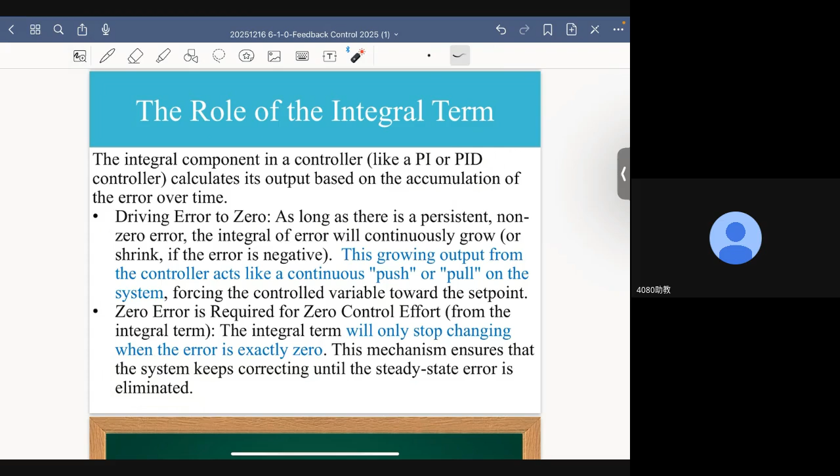It will only stop changing when the error is exactly zero. So this mechanism of integral control ensures that the system keeps correcting until steady state error is eliminated completely. That is why increasing the type number of the loop transfer function is very helpful for us to reduce the steady state error.

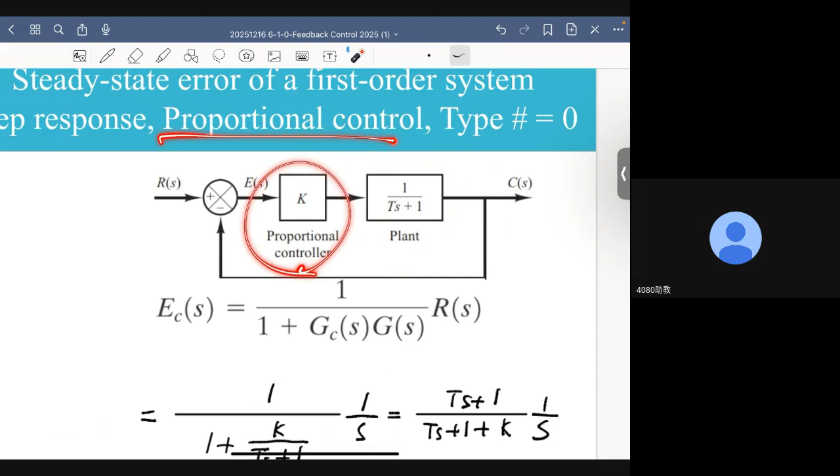Let me study a simple example: steady state error for a first order system. This is a first order system, and apparently the time constant is T, and what we have here is a proportional control. From the loop transfer function, in this particular case, the type number is zero.

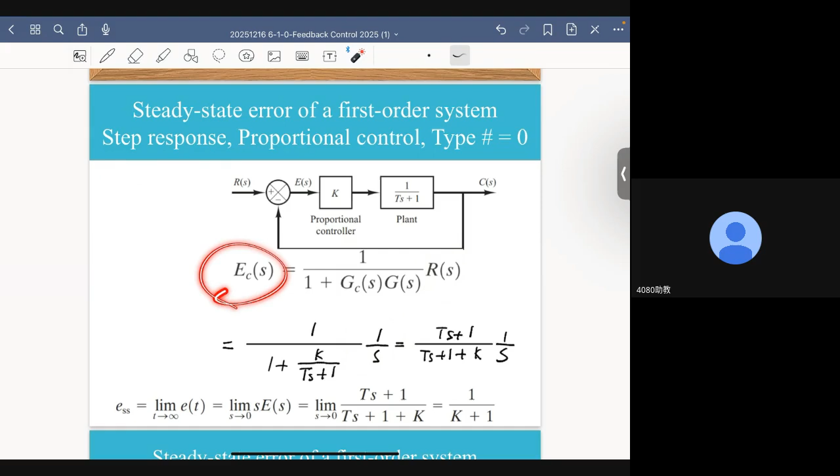Now, what is the output error of this feedback control system based on these equations we have already seen many times? It is this. Since GC is this, G is this, which is just nothing but a K, all we need to do is plug these terms into this representation, and this is what we get. Remember, here we are studying the step response of this feedback control system, so the nominal input is 1 over S. So this is the S domain representation of the error.

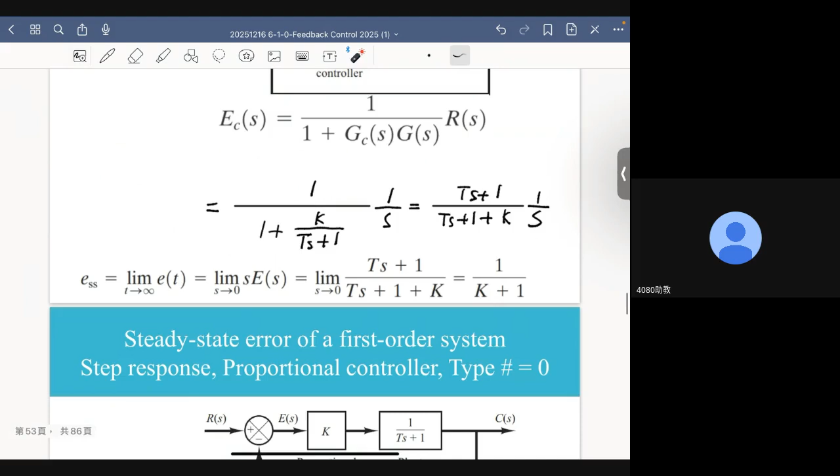Again, by applying the final value theorem, we know that the steady state error is this. This conclusion agrees with what we have learned: by increasing K, we increase the loop transfer function, and as a result we can have a smaller steady state error. Now, this is the result of the computer simulation of this feedback control system.

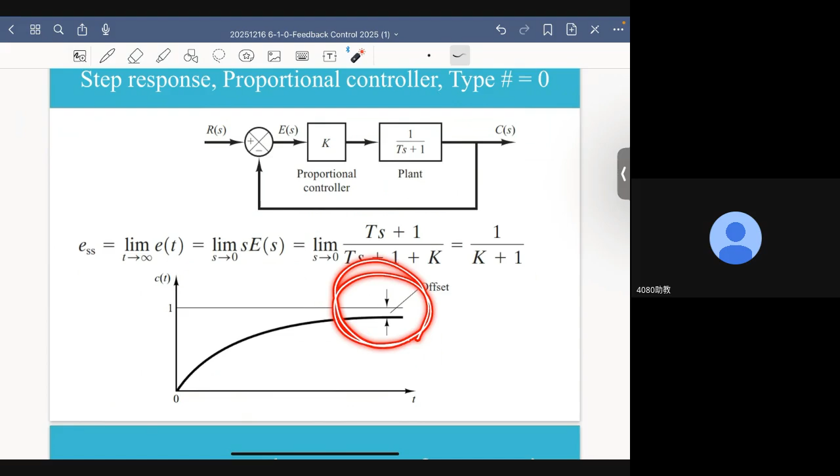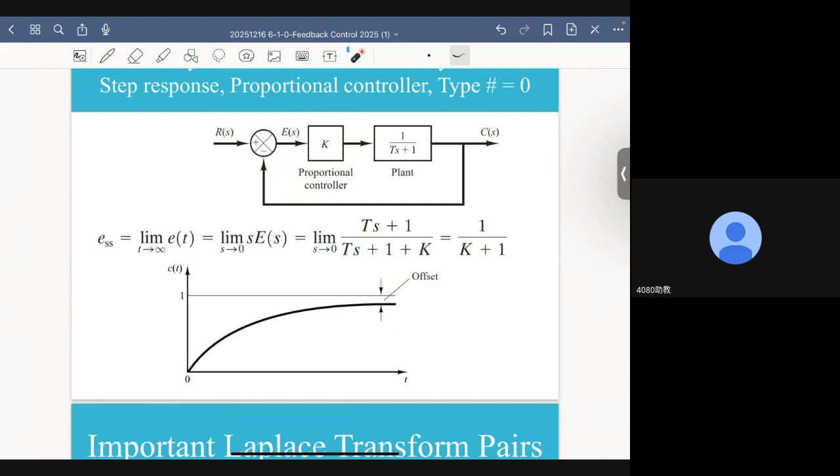As you can see, as time progresses, between the actual output and the desired output there is still some minor difference, which is this 1 over K plus 1. So by using a larger proportional gain, I can reduce this steady state error. But remember, there is a side effect: I may end up with a system with smaller phase margin and gain margin.

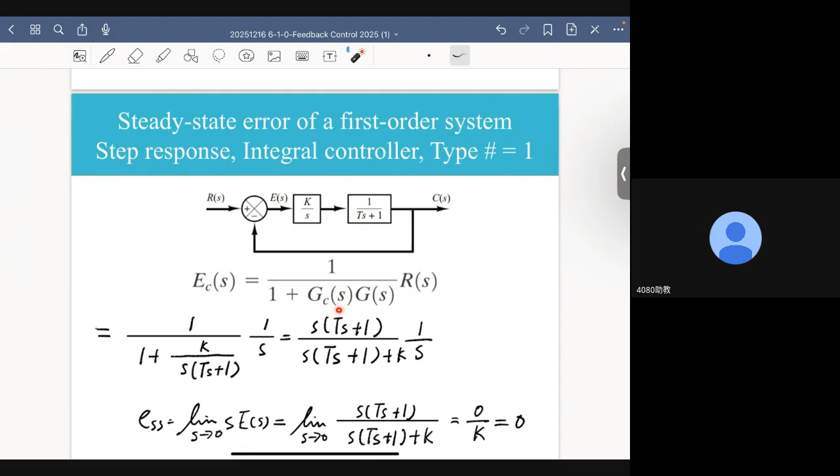Now, how do I deal with this problem? For the same plant, for the same system to be controlled, all I need to do is increase the type number from 0 to 1. So let me replace the proportional control with the integral controller using the same equation, but the only difference here is the GC is no longer just K, but K over S.

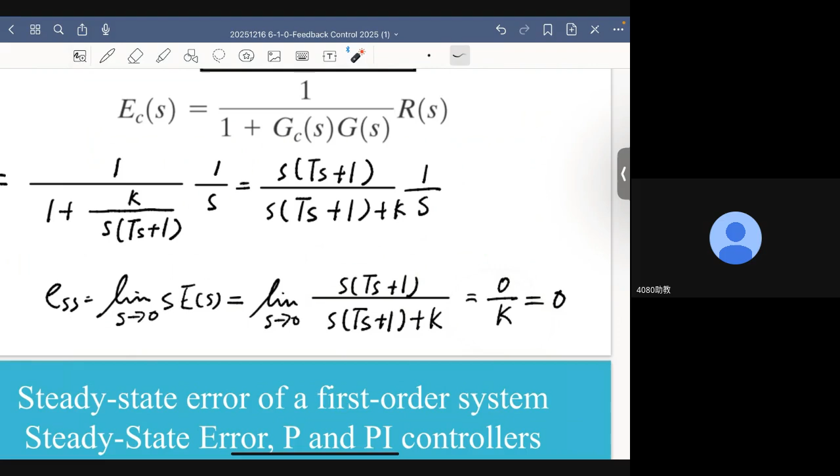I will come out with this result for the steady state error of this closed-loop feedback system. Again, by using the final value theorem, it is easy to see that when S goes to 0, this numerator becomes 0. Therefore, I have 0 steady state error. And we expect this result because this is a type 1 system.

From this table, we know that for a type 1 system, when the nominal input is a step function, we always have 0 steady state error, which we have just confirmed from our examples.

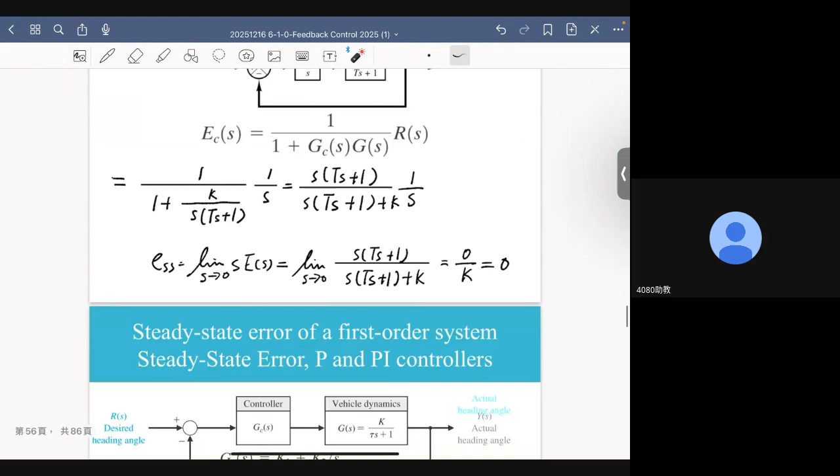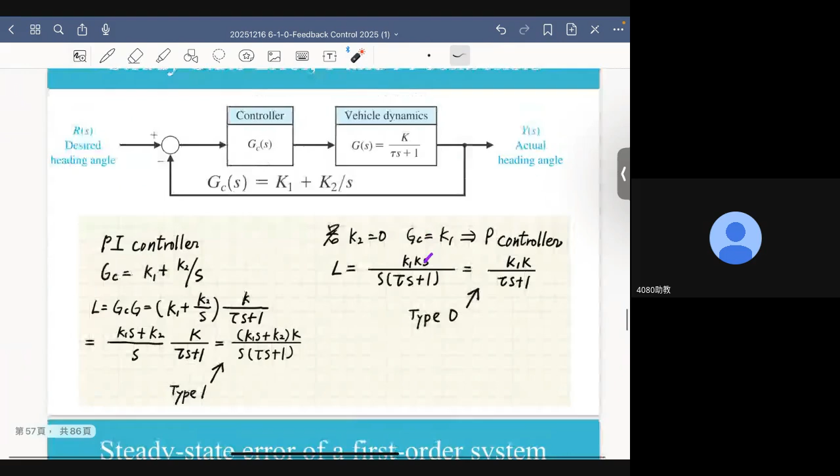Now let's look at another example. Here, what we have is not just a proportional controller or integral controller, but a PI controller. The process to be controlled remains a first order system where tau is its time constant. Here, the transfer function of the PI controller is this, K1 plus K2 over S.

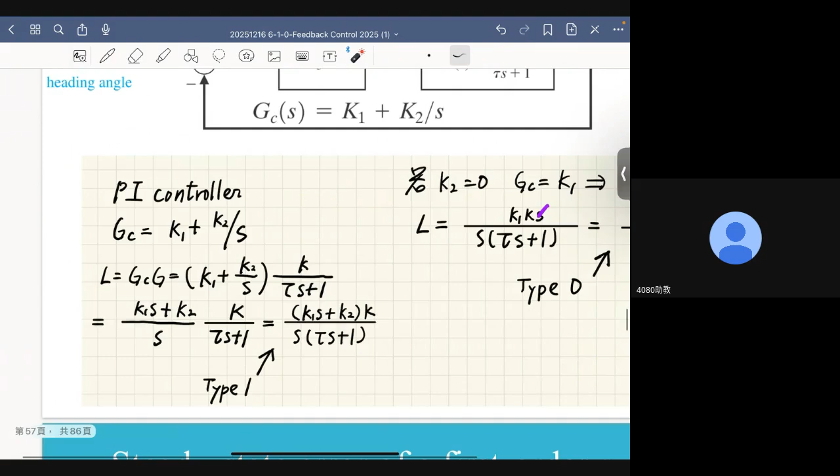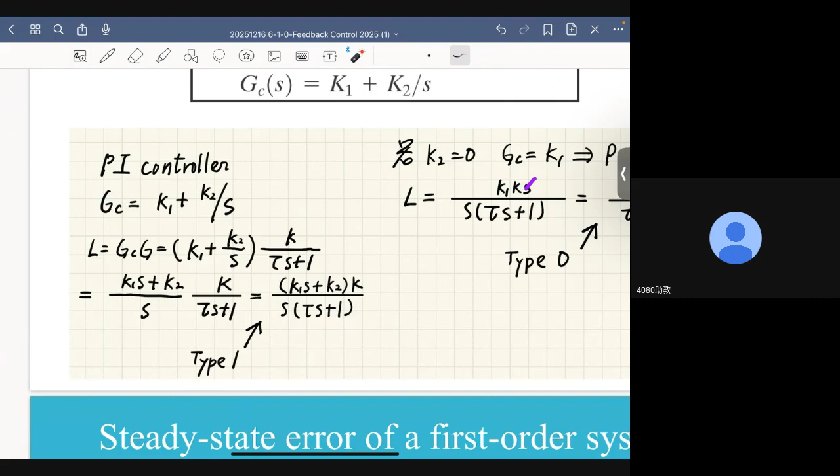And the loop transfer function is something like this. Apparently, with PI control, we have a type 1 system. Since we have a type 1 system, we expect 0 steady state error if the input is a step function. Now here, however, if we drop the value of K2 to 0, then the controller transfer function will be nothing but K1.

Therefore, when K2 is 0, what we have is not a PI controller, but just a P controller. In this case, from the loop transfer function, we know that we have a type 0 system. Now, for a type 0 system, apparently we will have...

When facing step response, the steady state error will look something like this. And the position error constant is defined as this.

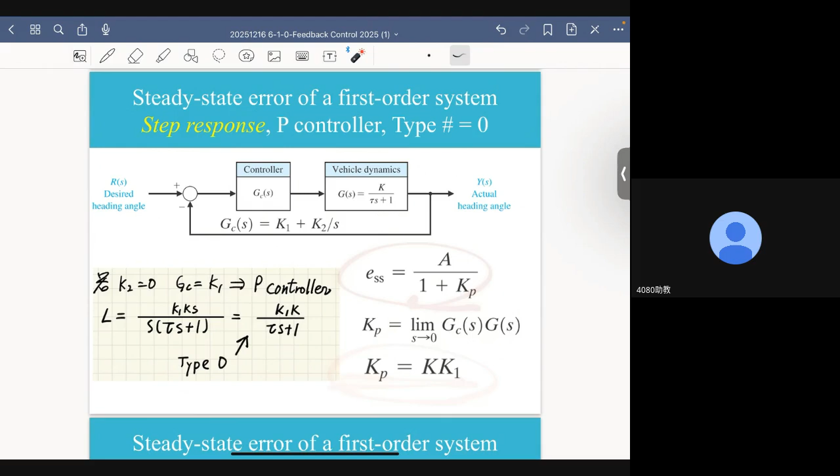Now, if I have a PI controller, then of course the steady state error will be 0. But what I need to look at here is I increase the challenge of the control. Now I need to deal with ramp response, which is, again, a moving target.

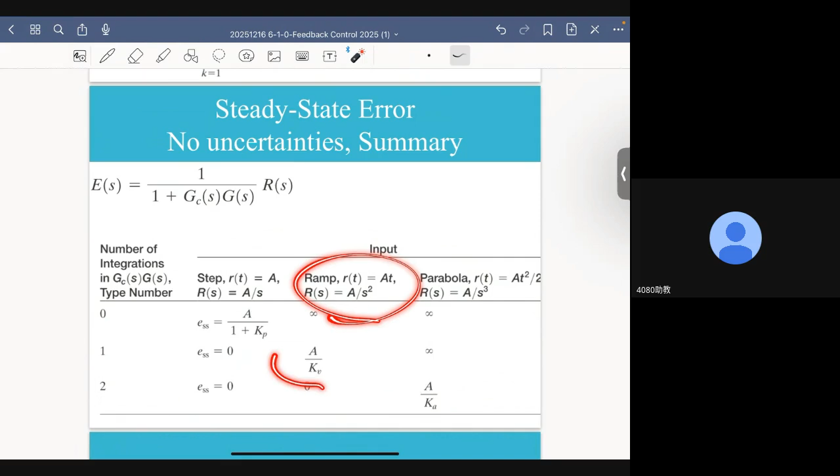And from the table that we summarized, here, when we have a type 1 system, and when the system is facing a ramp input, this is its steady state error. Well, KV is the velocity error constant.

And in this case, KV, considering the controller is this, and the system is this, KV is actually the product of K2 times K.

Therefore, how do I reduce the steady state error? For this particular system, I can do it by increasing K2. Now here, increasing K1 doesn't help.

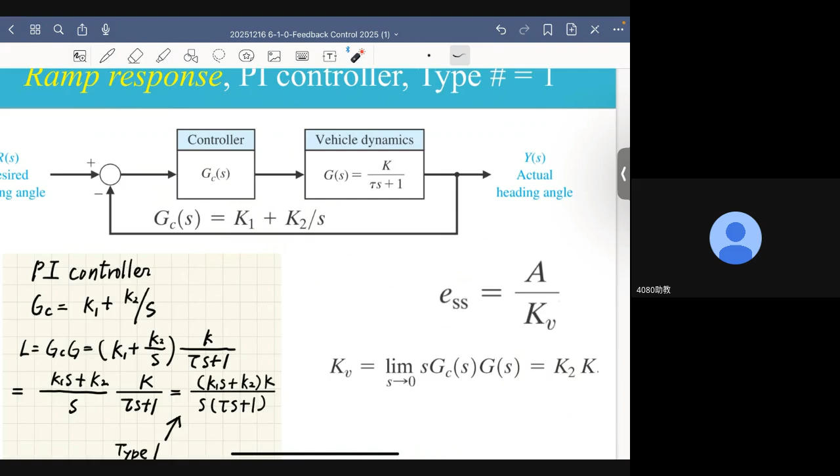But by using stronger integral control, I can effectively reduce the steady state error where the input is a ramp signal.

So these mathematical results are actually really helpful because they help me identify the source of the problem. And after identifying the source of the problem, then I know what to do to make things right.

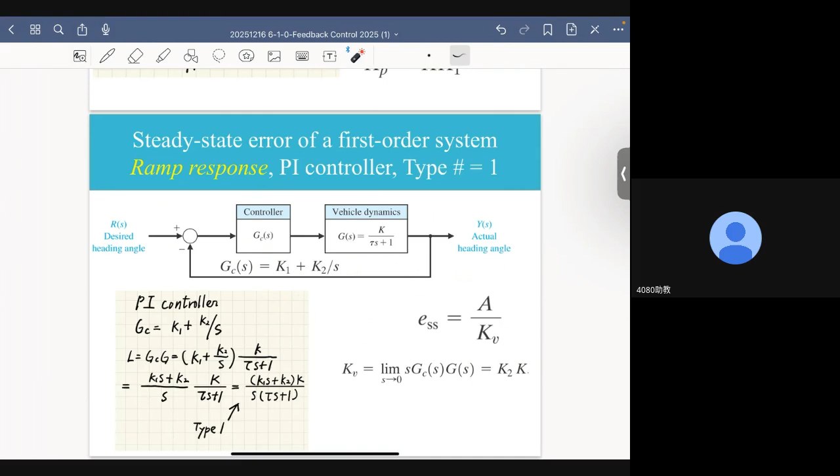Here, okay, increasing K1 does not help. However, by using a larger integral gain, I can actually reduce the steady state error.

Now this is a computer simulation result for this PI controller. Now here, what I have is not a ramp input, because for a ramp input it will just go all the way up. I actually have a series of ramp inputs with different slopes.

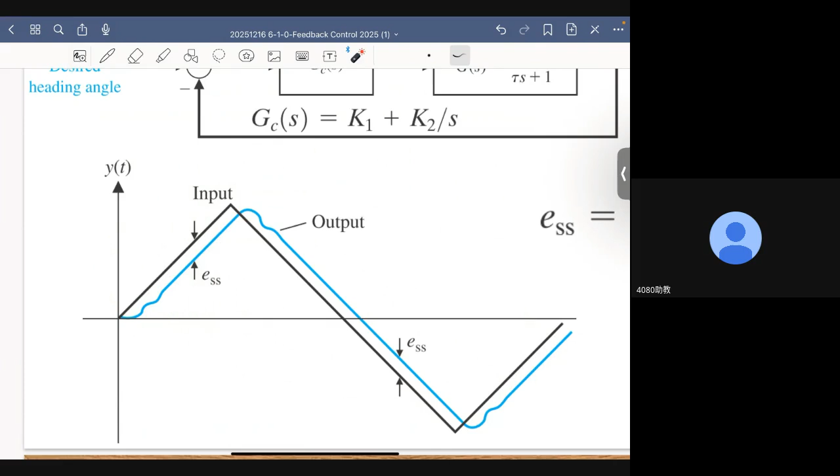As you can see, the actual output, represented by the blue curve on this figure, is working very hard to catch up with the nominal input, which is the desired output. No matter how hard it tries, there is always a gap between the actual and the desired output, because this is what we get.

So there is always a steady state error. Now let's look at another example.

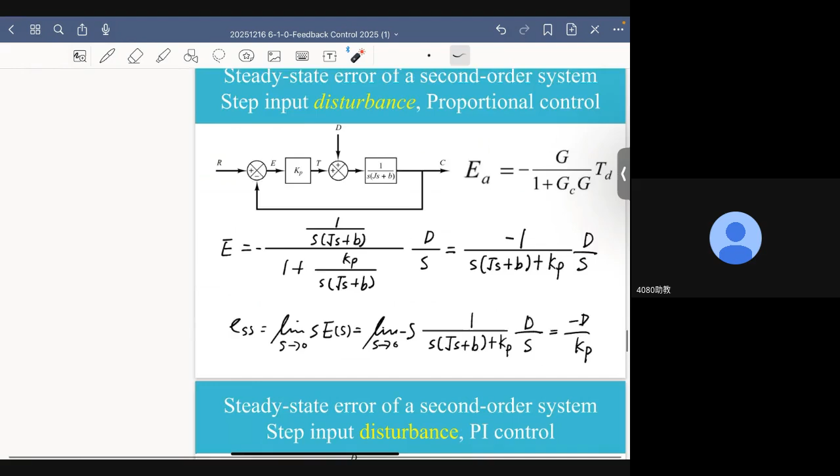Here, the difference is that now I need to deal with the second order system. And now what we need to do is investigate the impact of the input disturbance on the output error.

Now, we did not discuss this when it comes to the type number of the loop transfer function. We only discussed the nominal input. But you know, the basic idea of determining the impact of the input disturbance and its relation with the type number is pretty much the same.

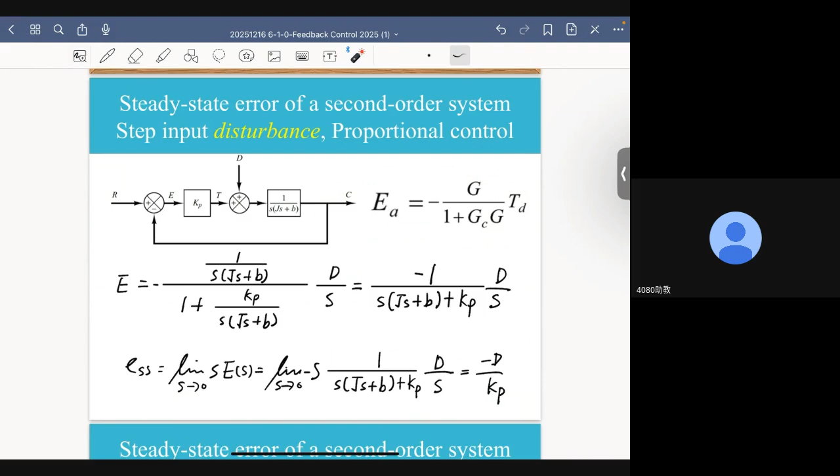Now the output error due to the disturbance is this. We saw this before. Now the next thing I need to do is recognize that G is actually this and GC is actually KP.

And by plugging this term into this representation, by going through all this algebra to get the transfer function, and by assuming that the input disturbance is a step input with a magnitude of D, its Laplace transform is actually D over S. And then we can come out with the transfer function, an S-domain representation of the output.

And then by using the same technique which we have already used multiple times, that is by using the final value theorem, I can determine the steady state error due to the input. All right, same thing happened here.

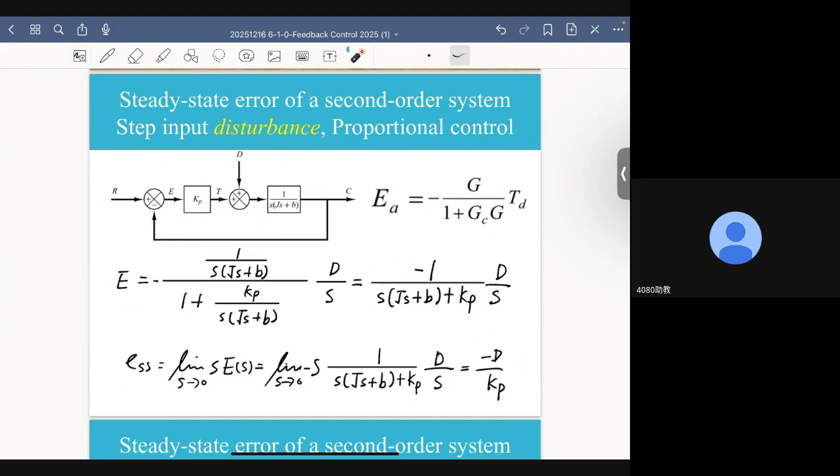To reduce the steady state error due to the step input disturbance, I need to increase KP, which means I need to increase the loop gain, which means the result we have here is in agreement with the results we saw in the previous two lectures.

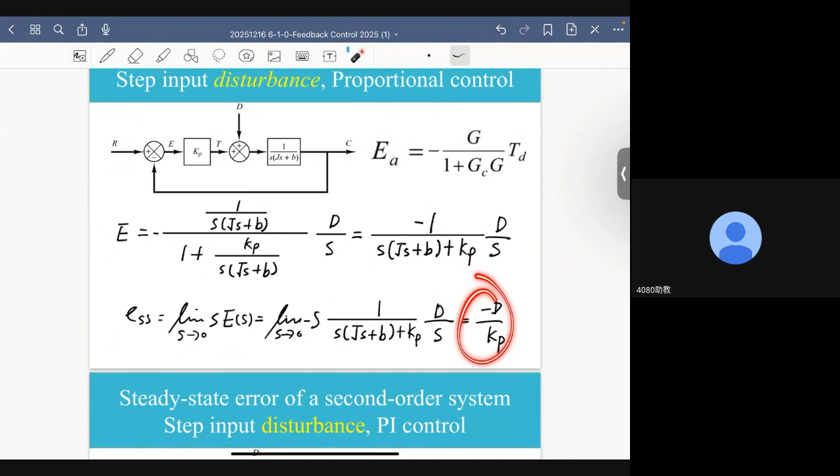Now, however, I can eliminate this steady state error by replacing this controller. For example, here what I have is a PI controller. By using a PI controller, I actually change the dynamics of the system. I increase the type of the system. And by going through all the algebra, there's nothing fancy here.

Every mathematical step involved in this derivation, I'm sure you have already seen before, and you can work through them if you want to. And the final result is that I have a zero steady state error.

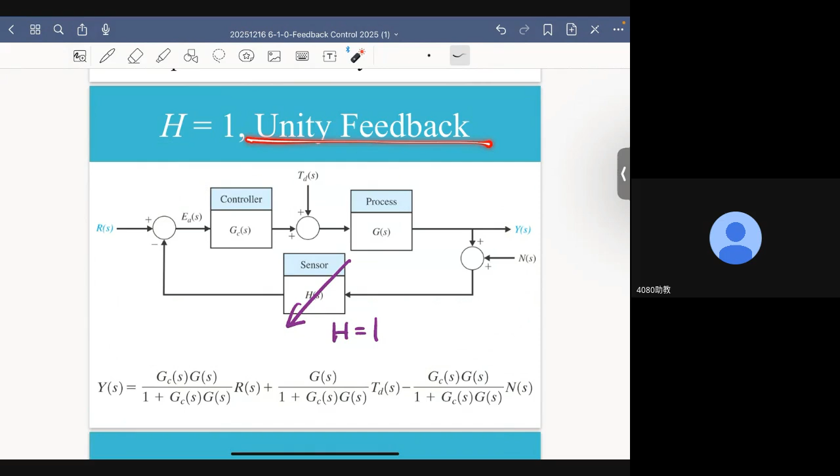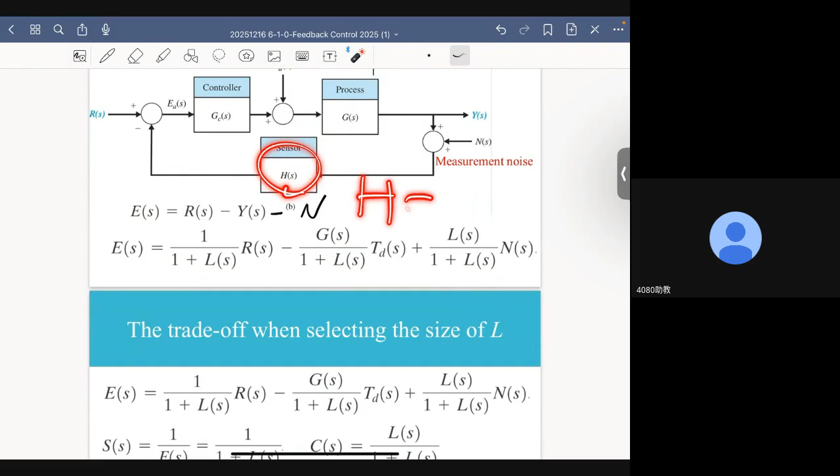For today's lectures, we assume unity feedback. We assumed, for example, in the beginning of today's lecture, we saw these slides, right? I assume unity feedback, which means H equals 1. And I have this representation for the output, and this representation for the output error. All these results are based on the assumption that H is equal to 1. But what happens if H is not equal to 1?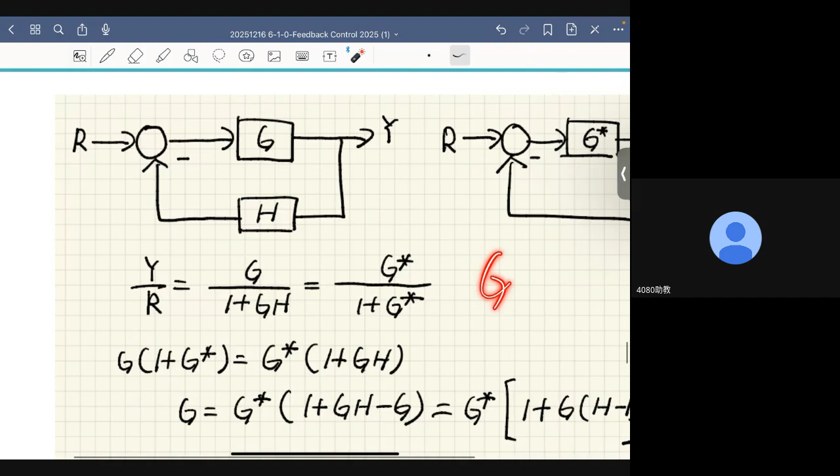So the next thing I need to do is require that these two terms have to be equal. So based on this equality requirement, I can determine what G star should be. To do that, all I need to do is take this product and make them the same. Now remember that G and H are all known.

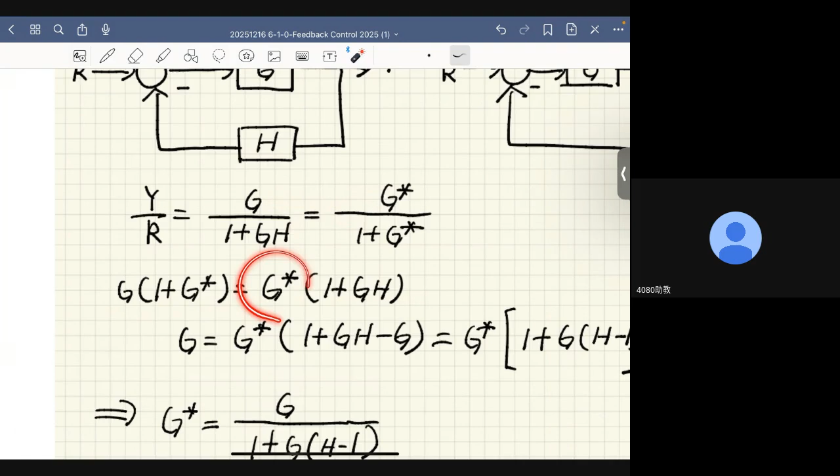The only unknown here is G star. So let me rearrange everything so that G star, and any terms involving G star, appear on the same side of the equality. So the first thing I do is move G times G star to the right-hand side of this equality, and this is what I get. As a result, it's easy to see that G star is actually this.

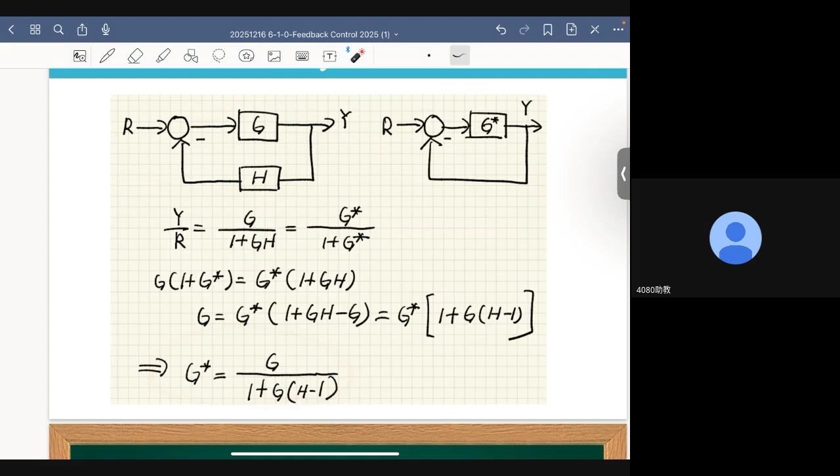So next time, whenever you see a system which is non-unity feedback, and you need to apply results derived from a unity feedback system to such a non-unity feedback system, all you need to do is perform this conversion first. Then you can transform this system to this so-called unity feedback configuration.

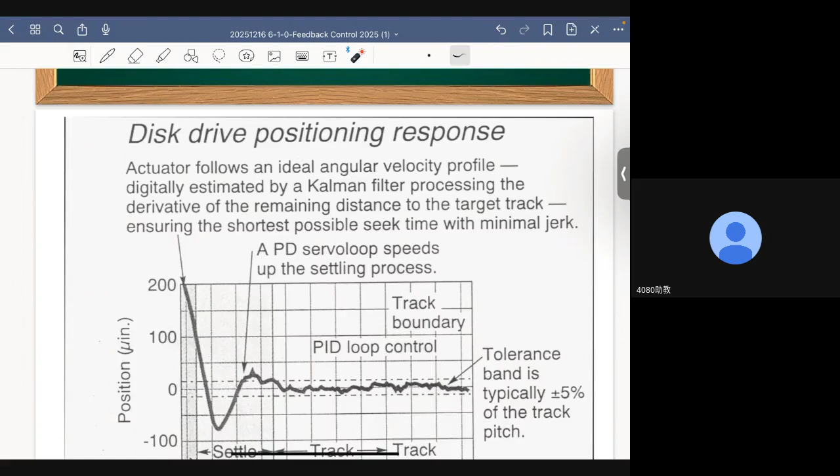And sometimes, even for the same control problem, you need to develop several control methods for different stages of the control process. This is what we call multi-stage control requiring multi-method strategies.

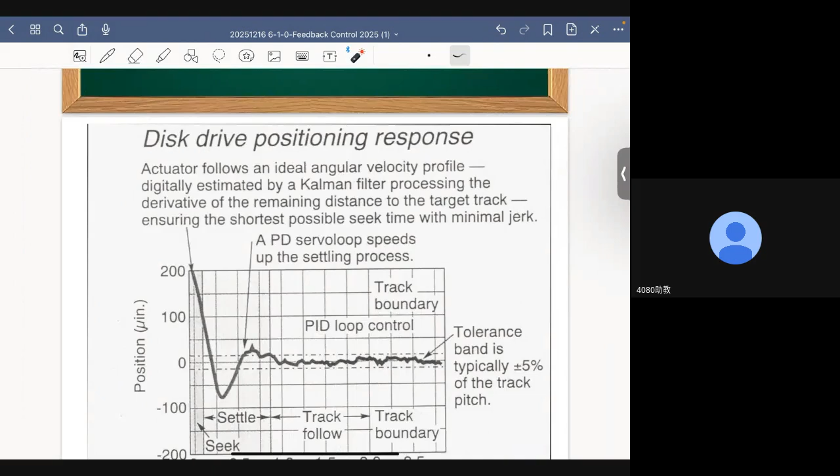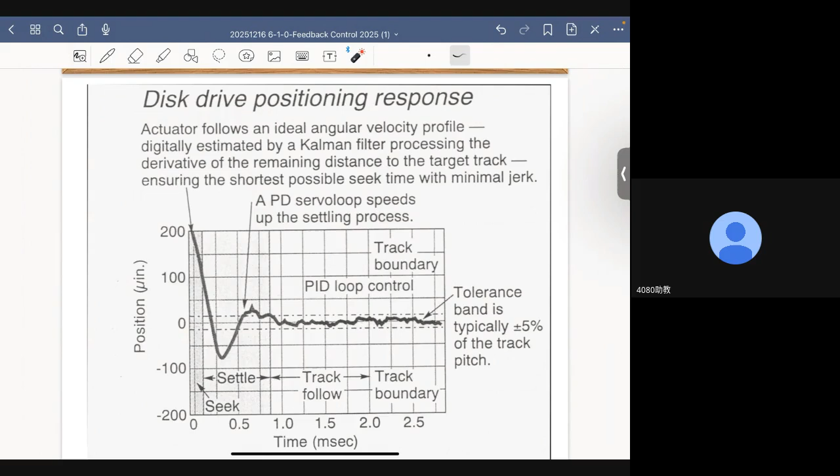This is an article I ran into many years ago, and it described the hard disk drive position control methods. In controlling the head of the mechanical hard disk, the control process is actually divided into 3 phases: the seek phase, the settle phase, and finally the track follow phase. In each of these 3 phases, the engineers from IBM apply or employ different control methods.

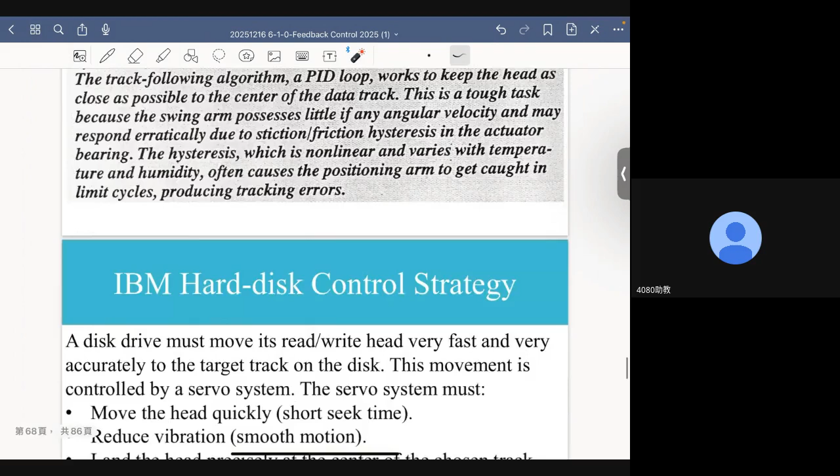For example, here they use PID control for the track follow. For the settle mode, it uses PD control. And for the seek mode, it uses so-called H-infinity optimal control. This is the original description from that article. Let me break it down into several slides.

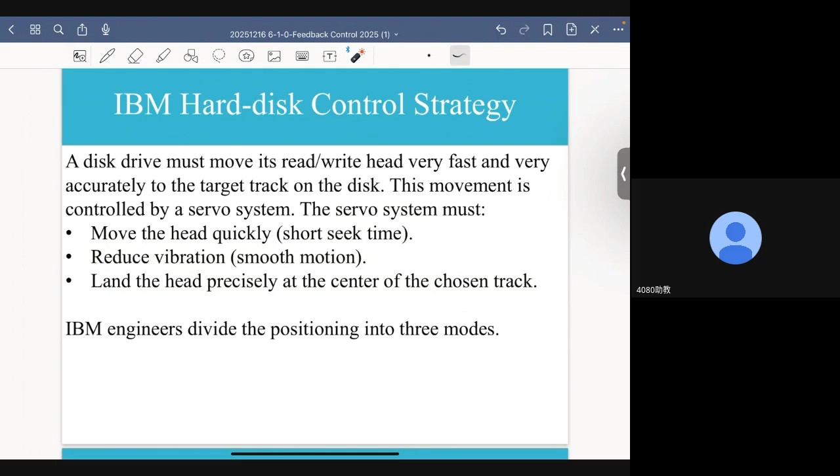Now IBM's hard disk control strategy actually consists of 3 phases. The goal of the first phase is to move the head quickly, as fast as possible, to reduce the so-called seek time. The second phase is to reduce the leftover vibration. And the final phase is to try to land the head precisely at the center of the chosen track, where the track is whatever data you want, and that is a storage location of the hard disk.

So IBM engineers divide the position control into 3 modes. The first mode is the seek mode. In this seek mode, the objective is to move the head from its current track to the target track as quickly as possible, because as a user, we want our hard disk to be fast. We want the computer to wait for us, not us wait for the computer. But some mechanical constraints need to be satisfied or respected, including actuator force limits, structural resonance, and things like that.

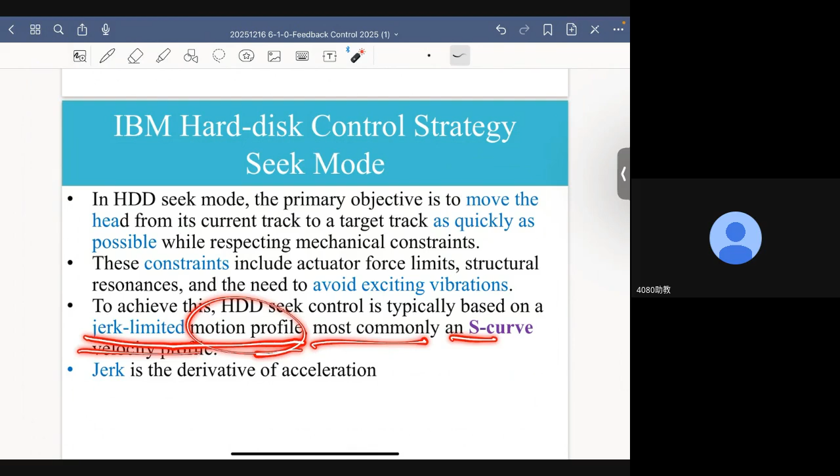And in this case, you have to come up with a strategy for fast disk movement. To achieve this, HDD control is typically based on a jerk-limited motion profile, most commonly an S-curve velocity profile. So in the seek mode, we first design a velocity profile, and then based on this velocity profile, we develop a trajectory following control strategy, which I will describe in the final part of our presentation.

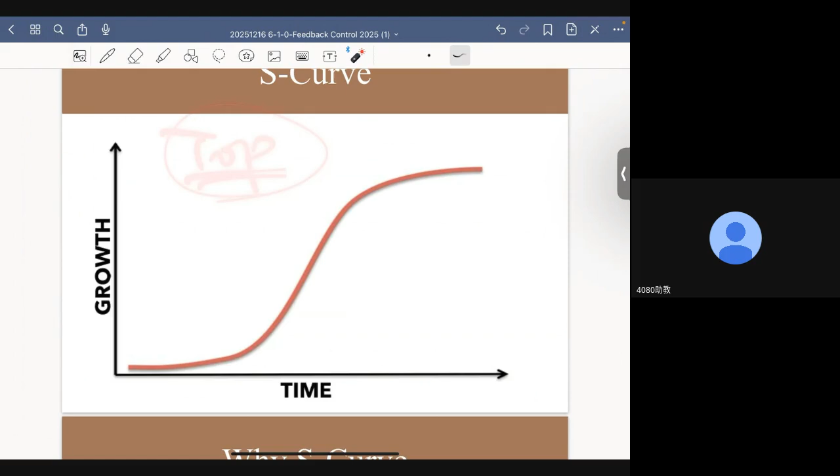Now, this is an S-curve. Remember, this is time, and this is velocity. So an S-curve implies that velocity increases from 0 to maximum value, because we want it to move as fast as possible. So let's first determine a top speed. This is the maximum speed that the hard disk arm can sustain, can provide.

Acceleration is ramped up smoothly, which means acceleration, remember, is the slope of the velocity. You can see the acceleration, which is the slope of the velocity, increase gradually, and then it also decreases gradually. So when you see the acceleration profile, it actually looks like this — this is time, this is acceleration. This slope is not too large, it actually looks like this. The acceleration increases smoothly, reaches its upper bound, and then decreases smoothly. So acceleration ramps up smoothly.

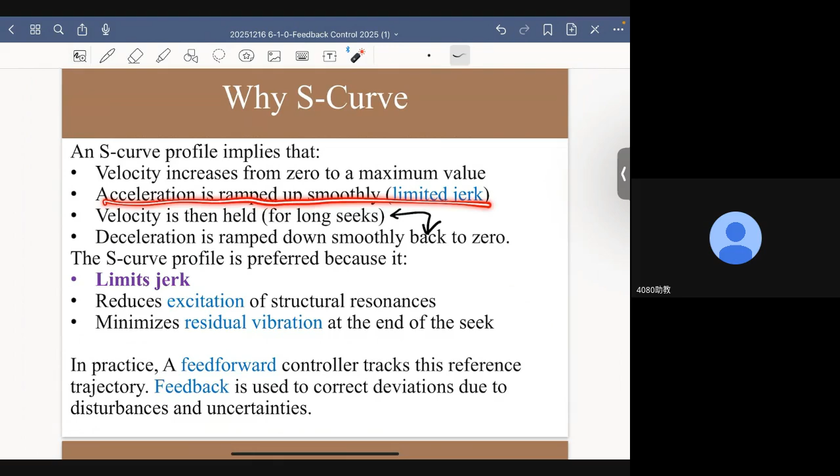And this is what we call limited jerk. Recall that jerk is the derivative of the acceleration. Now, deceleration ramps down smoothly back to 0. With 0 acceleration, velocity will not change anymore, which means it will stay at the top speed, and the velocity is then held.

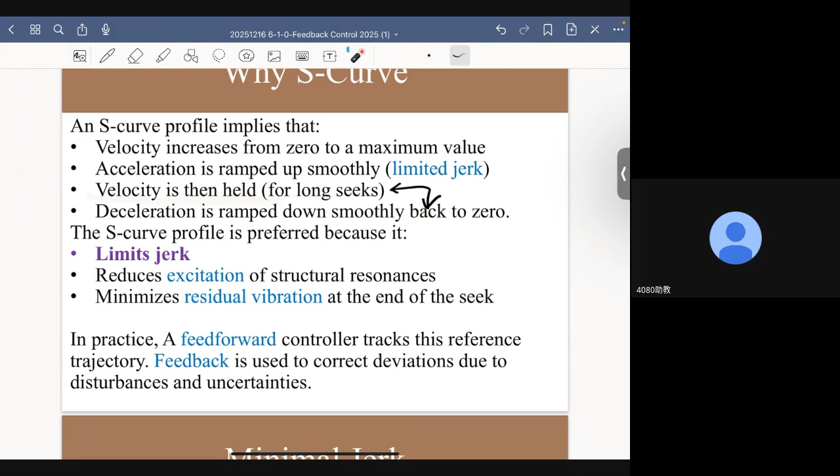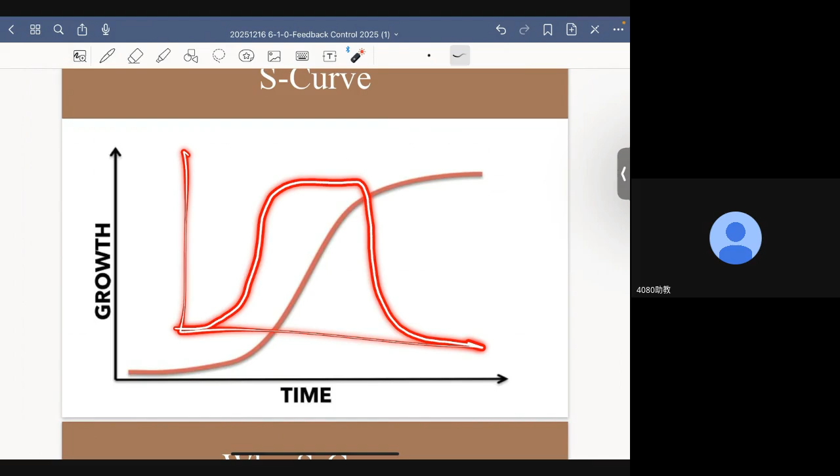We keep the maximum velocity and keep it going for a while. So what we have is this — we keep it at the maximum, and then when reaching our target, we will reverse the operation of the S-curve, which means the acceleration profile will look something like this.

Now, the S-curve — why do we prefer the S-curve? Because it has limited jerk. Remember, jerk is the slope of the acceleration. We don't want acceleration to change too fast. I'll explain why later.

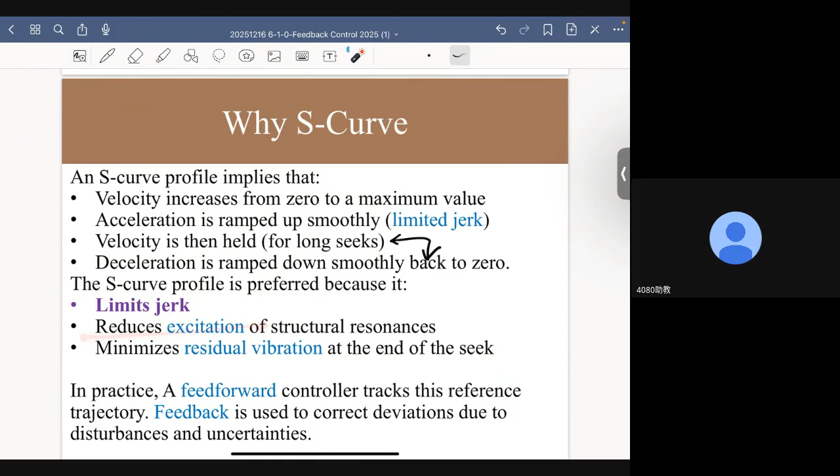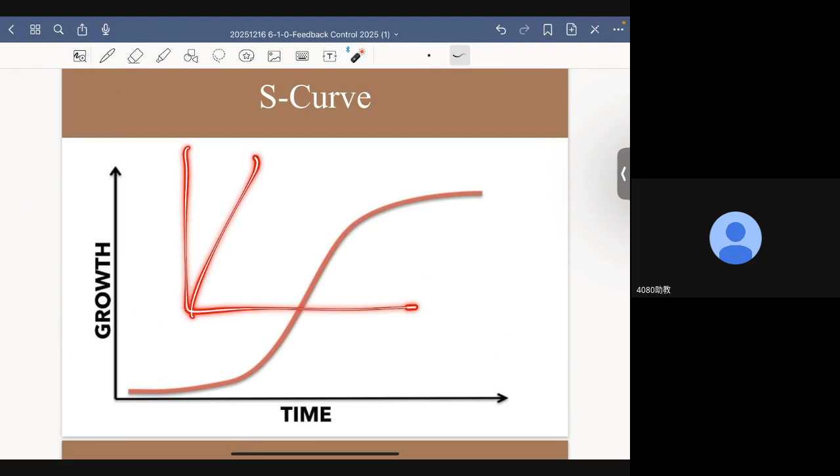By doing that, we can reduce excitation and minimize residual vibration, because this means we can have a smooth landing. The acceleration does not change rapidly; it changes gradually in an incremental, stable fashion.

During the process, jerk is important. Why? Because when jerk is smaller, we can suppress vibration. Jerk is the derivative of acceleration, and corresponds to sudden changes in acceleration. Acceleration is always proportional to force according to Newton mechanics. When A changes rapidly, that means you have large jerk, and if A changes rapidly, force changes rapidly. If F changes rapidly, it will have rich high frequency components. So high jerk corresponds to sudden changes in acceleration, and increases the high frequency components of the actuating force. This excites the structural resonance.

Think of the hard disk drive as a second order system. When you see its so-called Bode diagram, it looks something like this. It has a resonant peak, and this is the region we don't want to go into. This is the reason why jerk has to be minimized.

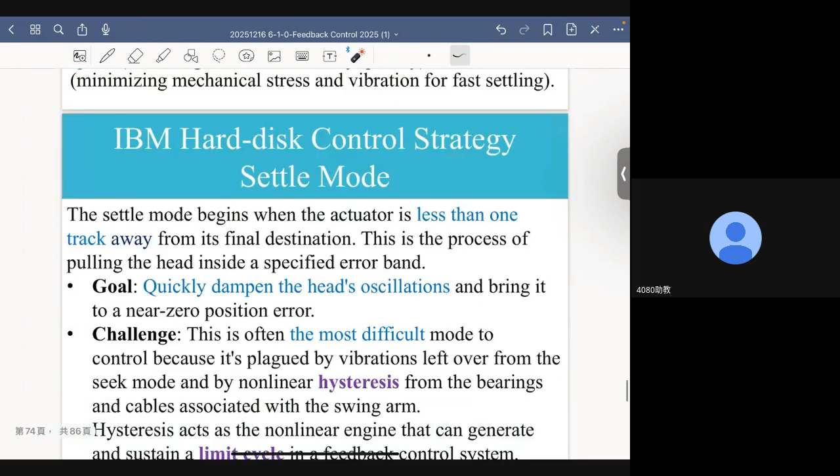So that's the first mode. The second mode is the settle mode. The goal here is to quickly dampen the head. Usually it is running at a fast speed, and now you want to reduce the speed of the system. So that is settle mode.

Use a PD controller to do that. This is often the most difficult mode because you will encounter hysteresis, and sometimes end up with limit cycles. Hysteresis here acts as a nonlinear engine that can generate and sustain a limit cycle. We will talk about these two properties in the third mode.

But here you need to understand why we need to use a PD controller here. Because originally, right after the end of the seek mode, the hard disk head is moving at a very high velocity. Now you want to bring down the velocity, and during the process, you want to avoid overshoot.

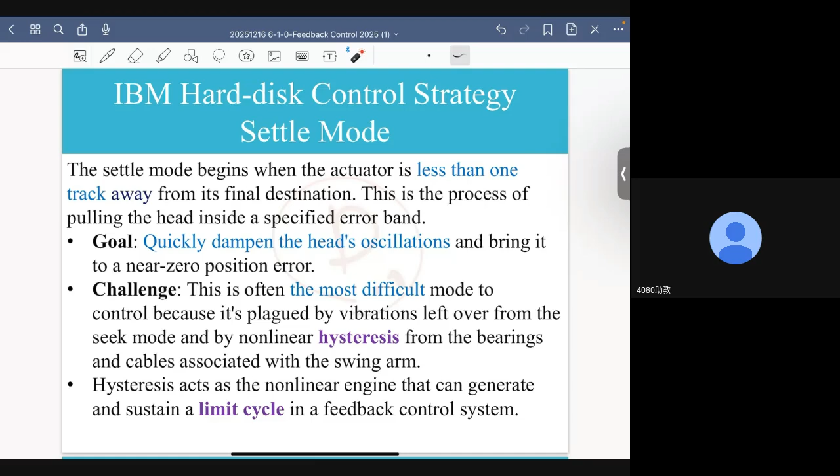How do you avoid overshoot? If we go back to the second order system, overshoot is only related to damping ratio. By using D control, we can increase the damping ratio, or at least adjust the damping ratio, to reduce vibration, to reduce overshoot, and hence avoid oscillation.

Now, the track follow mode uses PID controllers, so the arm can move even with tiny force, low stiffness, friction. It will also run into hysteresis.

This is a problem we often encounter in mechanical positioning, in performing position control for mechanical systems, because mechanical systems involve friction. When we were in junior high or senior high school, we were told that friction has two modes: dynamic friction coefficient and static friction coefficient, that friction can have two values. That is not true in the real world.

In the real world, friction is actually a function of velocity. It actually varies with velocity in this function. The statement that you only have two kinds of friction is simply a simplification of the real friction behavior.

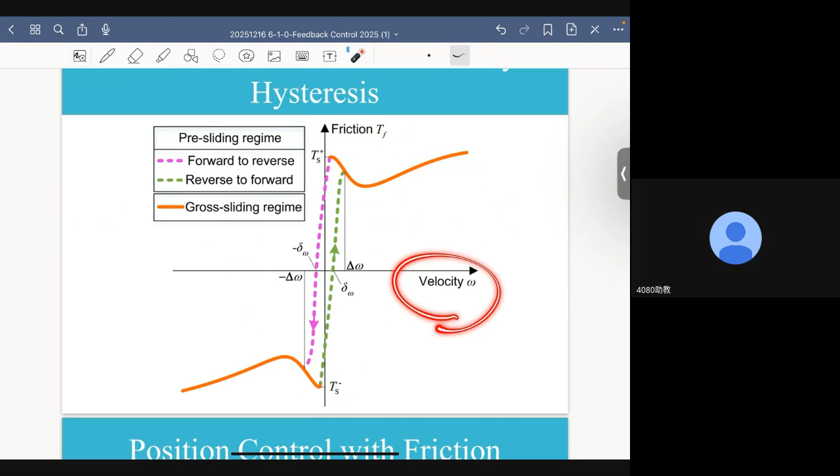Now, where does hysteresis come from? It actually presents something like this. Why do we have such a result when it comes to position control? When studying the relationship between velocity and friction, why do we have this hysteresis phenomenon?

In performing position control, the entire process can be described by the following phases. In the beginning, let's say we are already very close to our target. Why do we start near the target? The control system is near the target position, but a small persistent error exists. So it's close, but the positioning accuracy is still not good enough. The corrective force commanded by the controller is not yet strong enough to overcome the stiction in the moving parts.

But when an object is sitting there still, the friction force is relatively large. So in the beginning, the force produced by the controller is simply not large enough. But remember, we can use PID control, and the PID control is based on the accumulation of the error. If my force is not large enough, then the object will not move, and the error will remain the same.

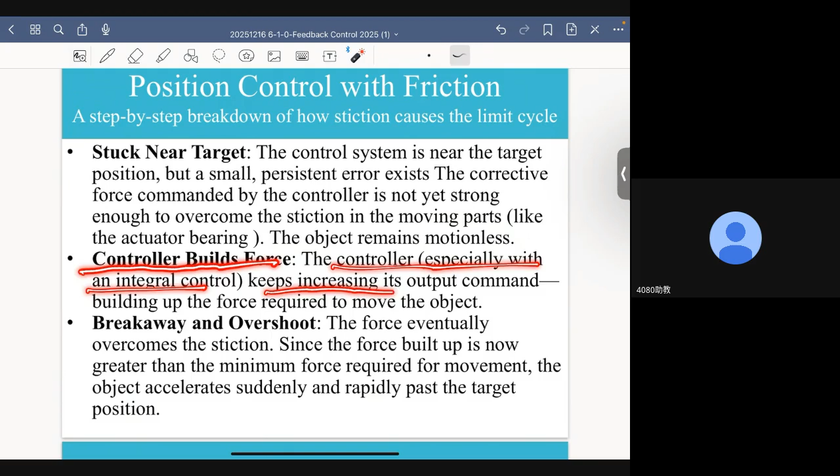If the error remains the same because I integrate over time, the accumulating error will increase, and therefore the controller will produce a larger output to try to overcome this problem. Now, before that, the object remains motionless, and then the controller will start to build force.

The controller, especially with integral control, keeps increasing its output command, building up the force required to move the object, and then it breaks away and overshoots. The force eventually overcomes the stiction. Since the force built up is now greater than the minimum force required for movement, the object finally starts to move, but it accelerates suddenly and rapidly past the target position. Why does it rapidly pass the position? Because once the object moves, the friction becomes smaller, and then it easily overshoots the target.

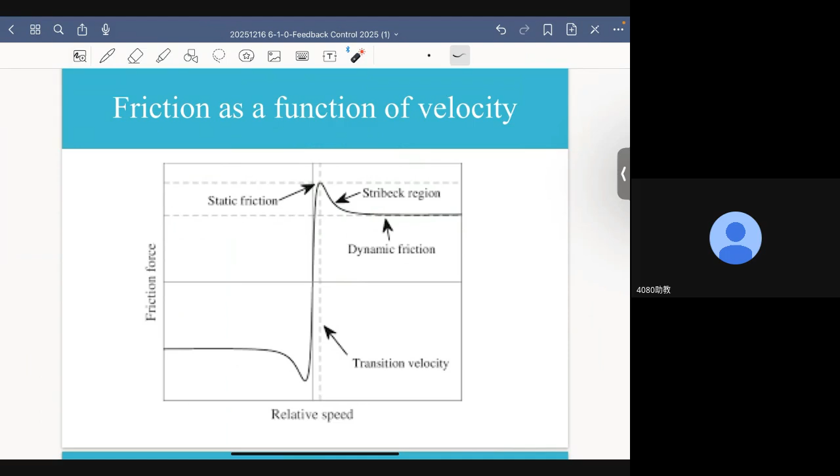This happens in real life. When you try to move an object, a big table for example, initially it is very difficult to move. So you increase your force gradually, and finally you move the table, but you overshoot because the friction suddenly reduces.

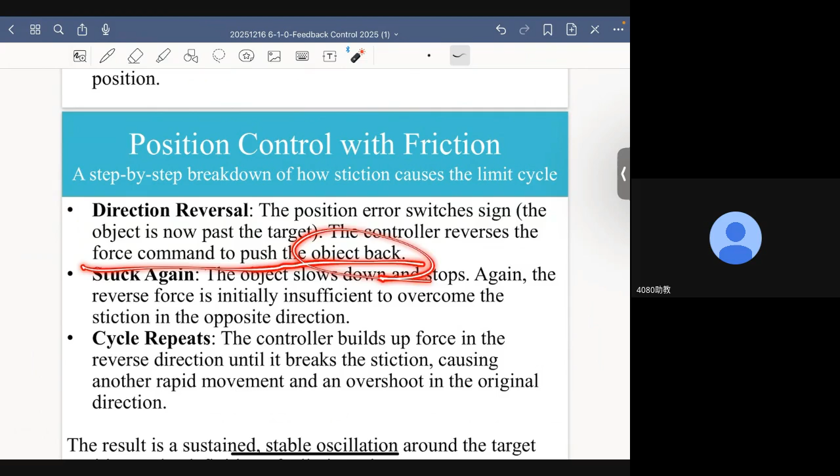And then it ends up like this, meaning you overshoot and then the direction reverses. The position error switches signs. The object is now past the target. The controller reverses the force command to push the object back, and it gets stuck again. The object slows down and stops. Again, the reverse force is initially insufficient to overcome the stiction in the opposite direction, and the cycle repeats.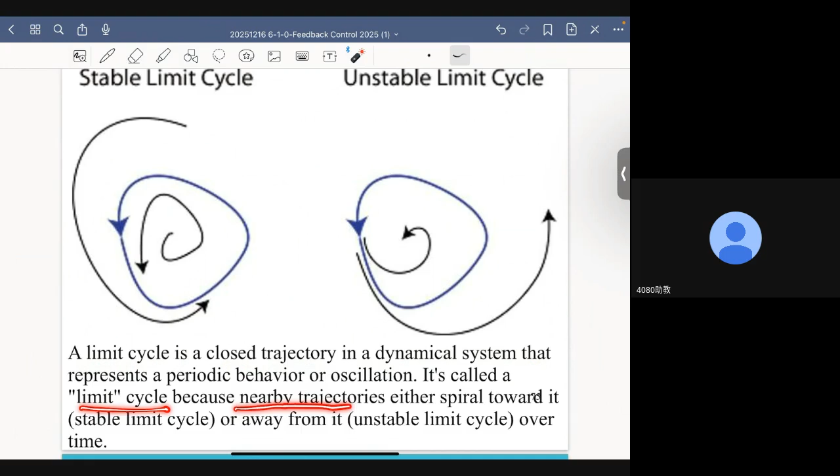What happens is that the motion will look like a limit cycle. The limit cycle is a closed trajectory in a dynamic system that represents periodic behavior or oscillation. It's called a limit cycle because nearby trajectories either spiral inward or outward. This is what we call a stable limit cycle, and this is an unstable limit cycle. When you look at the motion of the object, it typically looks like this.

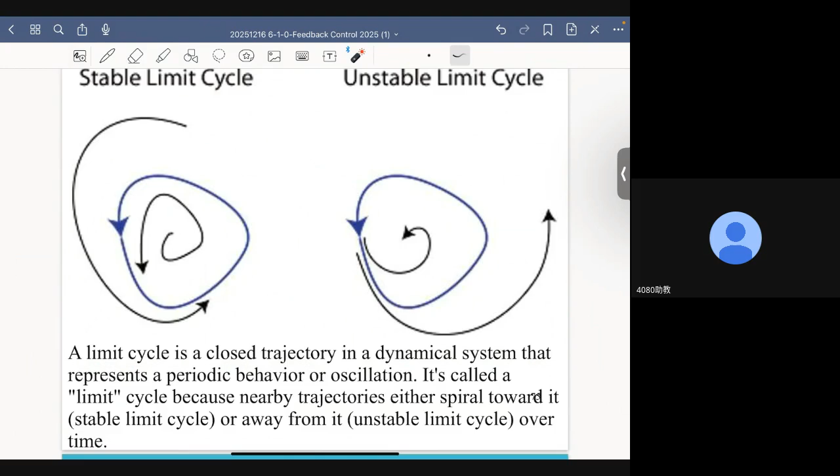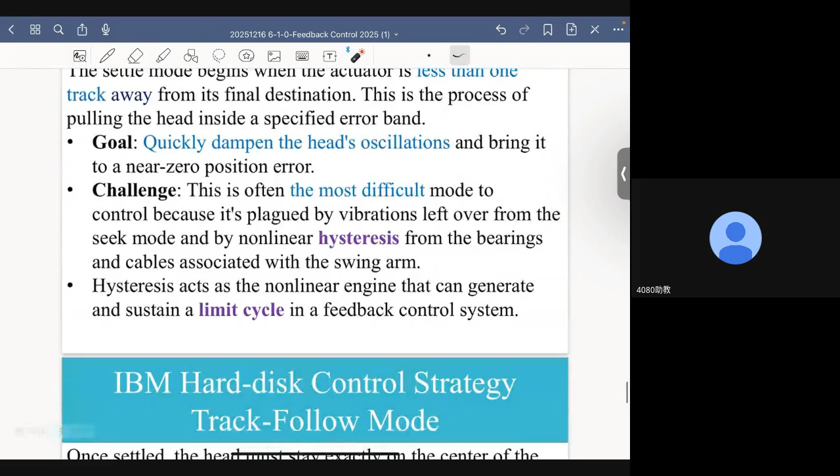So it ends up with a limit cycle due to this so-called hysteresis effect, and the hysteresis effect comes from the friction. So friction in this case is really the source of the problem. Hysteresis acts as the nonlinear engine that can generate and sustain a limit cycle in a feedback control system.

So how do you resolve these two problems? The first solution is tribology, that is, you come up with some lubricant to minimize the friction. The second solution is that you don't want your object to have any contact, so you use a magnetic levitation system to separate the object with no contact. When the object I want to move is levitated by magnetic force, there will be no contact. If there is no contact, there will be no friction force, and that can solve my problem.

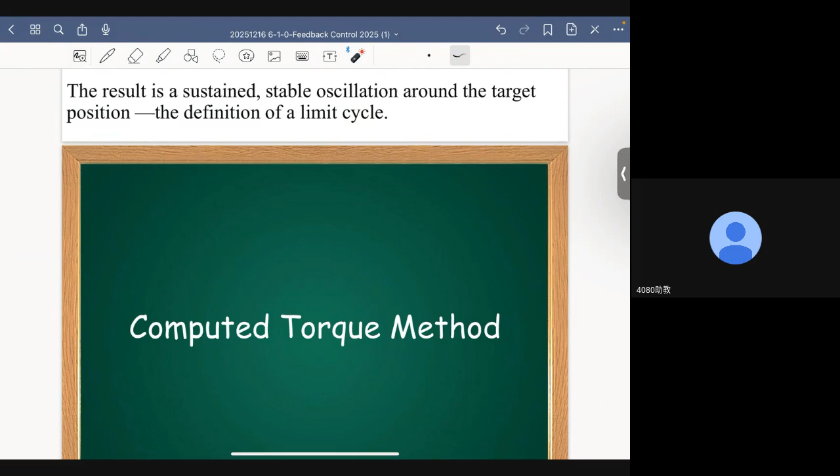Now, the final issue we want to address is related to the first phase of the hard disk drive system. Remember that in this phase, the goal is to move the hard disk head as fast as possible. To get that done, what we need to do is design a velocity profile such as an S curve.

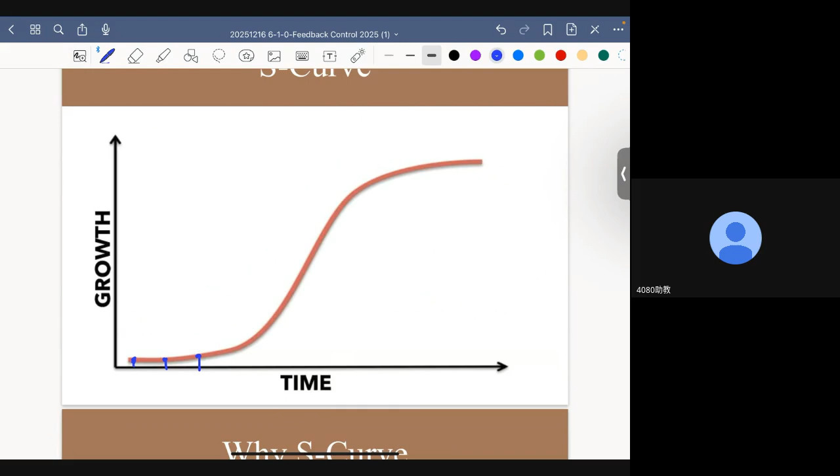Now, the problem is, how do you make your control system's output follow this S curve? There are two possibilities. The first possibility is I have an S curve, which is the desired velocity profile for my system, and then I divide this curve into many sub-intervals.

For each sub-interval, what I need to do is point-to-point motion control, which means going from here to here, from here to here. I just assume this is my starting point, which is zero, and this is my target. So I have a constant desired output, and that is one solution.

This solution is apparently not very good, because when you see robot dance, at least the old robots, not today's robots, I'm talking about robots in old movies, it moves like this. Its motion is not smooth at all. Why? Because its control strategy is based on this so-called point-to-point control process. And we don't want that, because we want the motion of our robot to be silky smooth. So how do we do that?

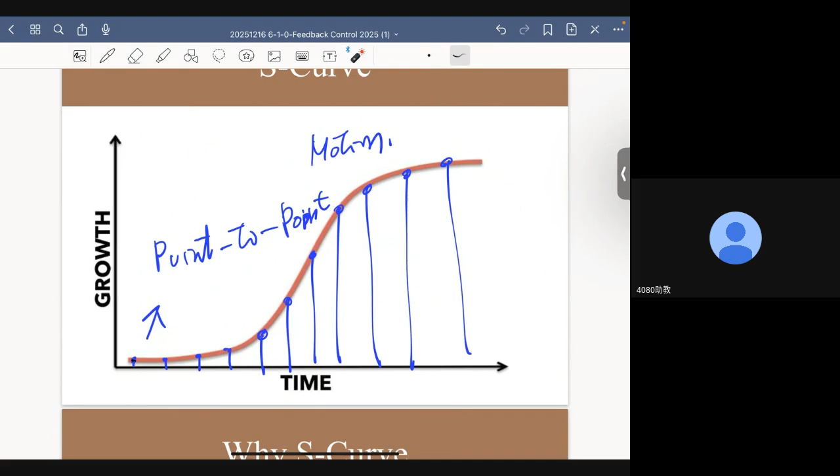One way to resolve the problem is what we call computed-torque methods, which is based on inverse dynamics. Let's assume the system to be controlled is this second order system, where X is the displacement and F represents the force.

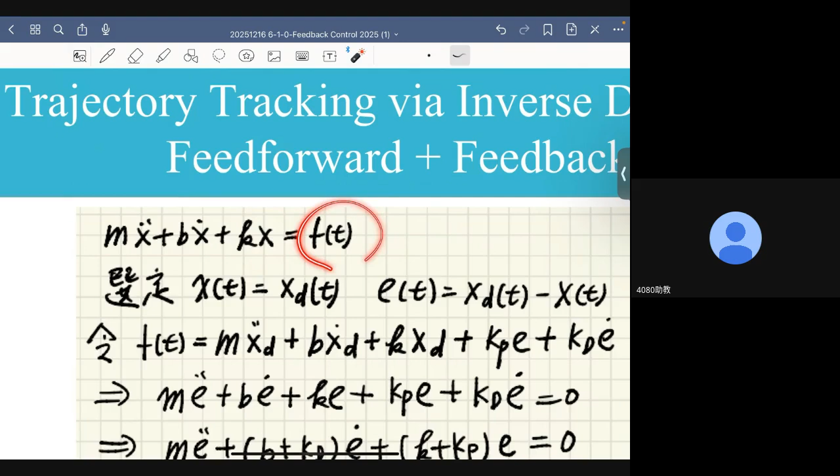Let's assume the desired trajectory, which can be an S curve, has already been determined and is denoted as XD of t. So what I want is to have the system produce output to follow this desired trajectory, to perform so-called trajectory tracking.

I define the tracking error as the difference between desired X and actual X. Now, how do I determine F of t?

I use feed-forward control methods by using the method of inverse dynamics, because I know what the desired output is. So I can take its derivative, take its second derivative, and plug XD dot and XD double dot into this equation, and accordingly compute the resulting corresponding F of t. This is what we call inverse dynamics.

When F of t is known, X of t needs to be solved - this is what we call direct dynamics. Mathematically, it involves the solution of an ordinary second-order differential equation.

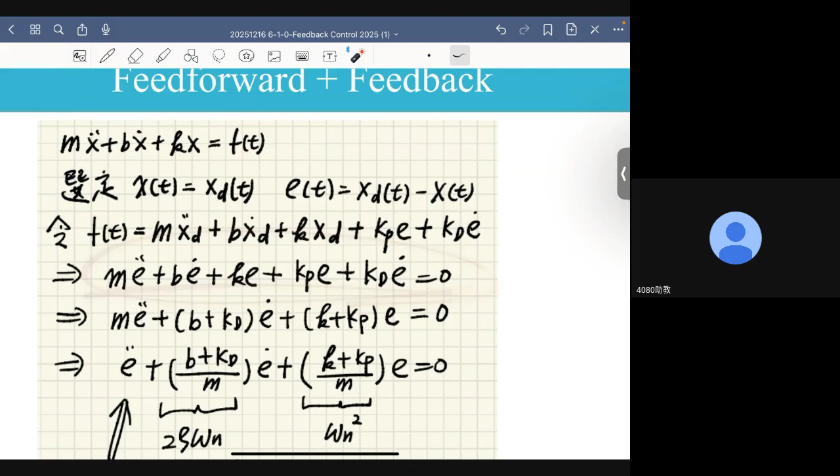By putting things together, this is what I will get. By dividing everything by m, this is the error equation, which is a standard second order system without any input.

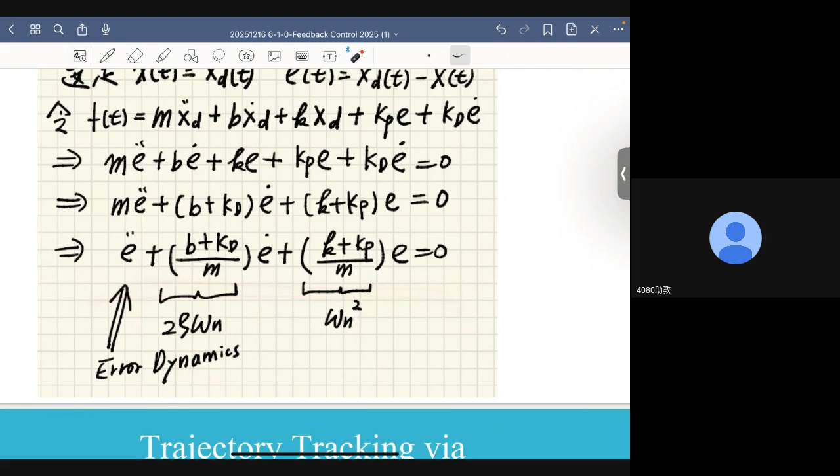By tuning KD, I can determine the damping ratio of this second order system. By changing the value of Kp, I can determine the natural frequency of this second order system, and I can therefore effectively control the tracking error.

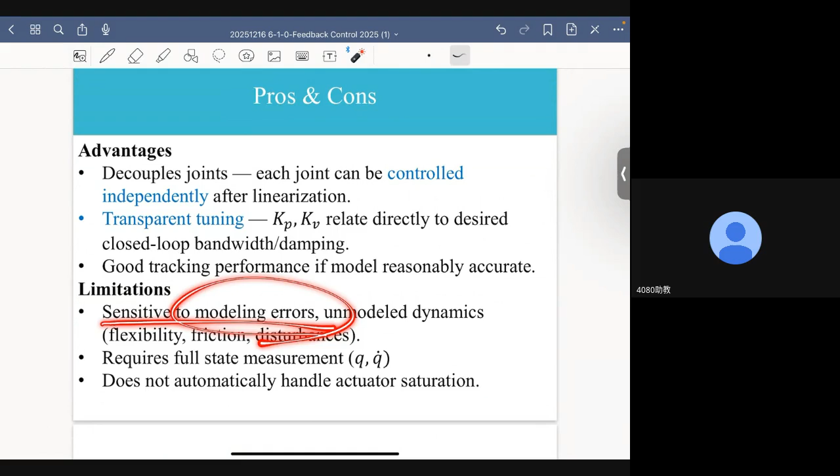If you want to do robotics, if you want to design robots, this is the way to go. Now of course it has some limitations - the first and most important limitation is it is sensitive to modeling errors, so these parameters need to be very, very accurate.